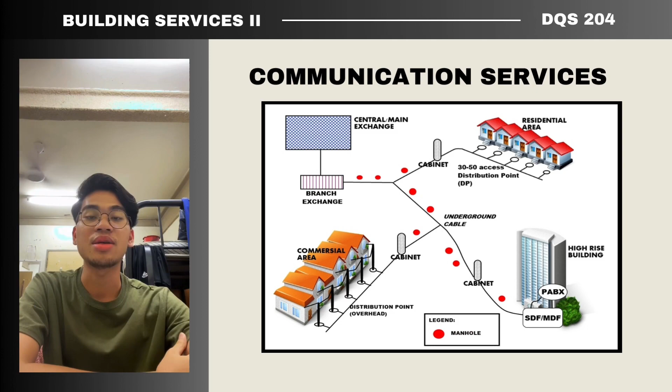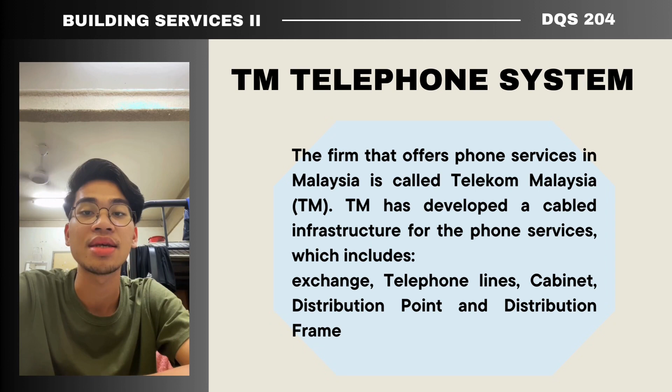So, what is TM telephone system? TM telephone system is the firm that offers phone service in Malaysia. It's called Telekom Malaysia. Telekom Malaysia has developed a cable infrastructure for the phone service, which includes exchange, telephone lines, cabinet, distribution point, and distribution frame.

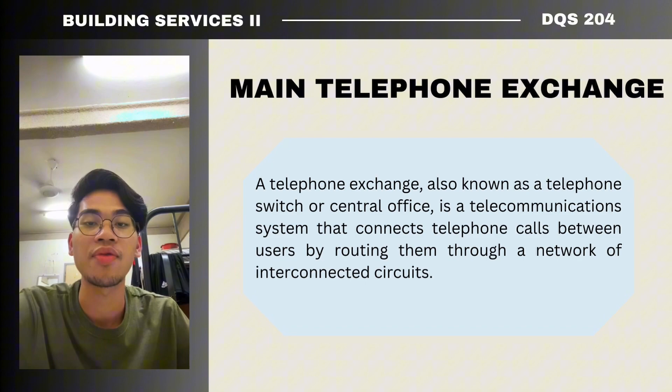What is a main telephone exchange? Main telephone exchange, also known as a telephone switch or central office, is a telecommunication system that connects telephone calls between users by routing them through a network of interconnected circuits. The main purpose of a telephone exchange is to manage and control the flow of telephone calls within a network.

When a person makes a phone call, the exchange receives the signal and routes the call to the intended recipient telephone. The exchange also manages the resources needed to establish and maintain the call, including 3 items. The first item is allocating channels on the network. The second item is handling billing and call records. And the last one is monitoring and managing network performance.

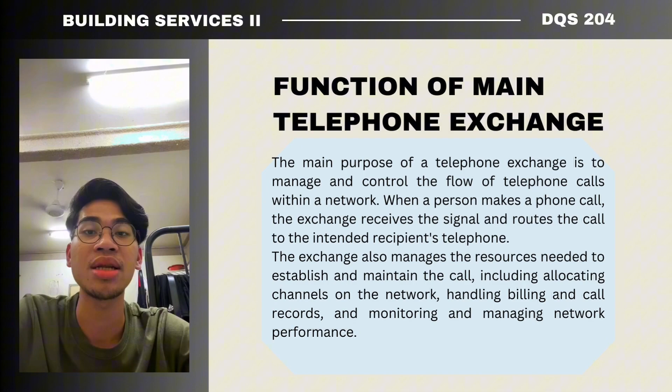A main distribution frame (MDF) is a signal distribution frame or cable rack used in telephony to interconnect and manage telecommunication wiring between itself and any number of intermediate distribution frames and cabling from the telephony network it supports. Next, the main distribution frame is used for distributing the telephone cable into several lines for multi-subscribers with one or more lines in a single building.

Secondly, on terminal blocks, lines from incoming cables are joined to lines from the internal telephone wire. A frame holds the terminal blocks. This frame is known as the main distribution frame, or MDF. Function of MDF: firstly, to simplify network connectivity and management. It acts as the central point where all the network lines converge, making it easier to monitor and maintain network connections. Secondly, MDF enables efficient cable management, reducing clutter and ensuring a neat and organized networking setup.

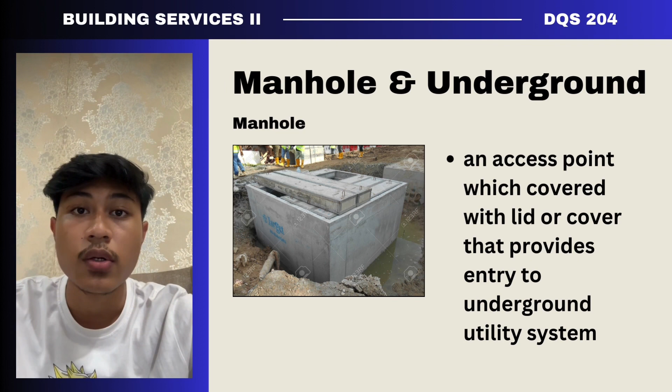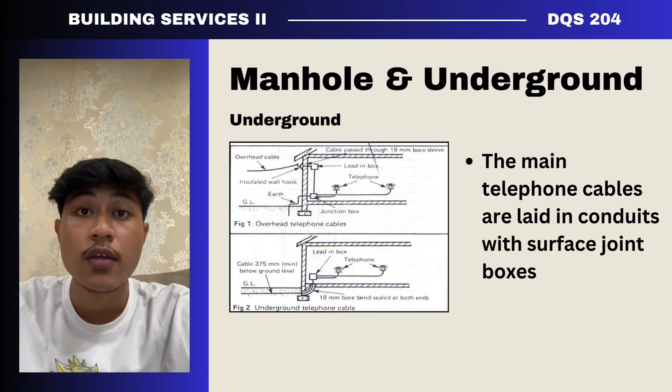Now we'll talk about manhole. A manhole is an access point covered with a lid or cover that provides entry to an underground utility system. The function of a manhole is to provide access points to underground utility networks such as sewage systems, stormwater drainage, water supply lines, gas pipelines, and telecommunication cables. Underground cable: as we can see, the main telephone cables are laid in conduits with surface joint boxes. In addition, most big and medium-sized buildings receive their telephone cables from under the ground.

Overhead cable. In Malaysia, it is mostly used for domestic houses and shop houses. We can find it at a highway or your house area. An overhead cable is smaller and cheaper than an underground cable. So the function of overhead cable is to transmit electrical energy along large distances.

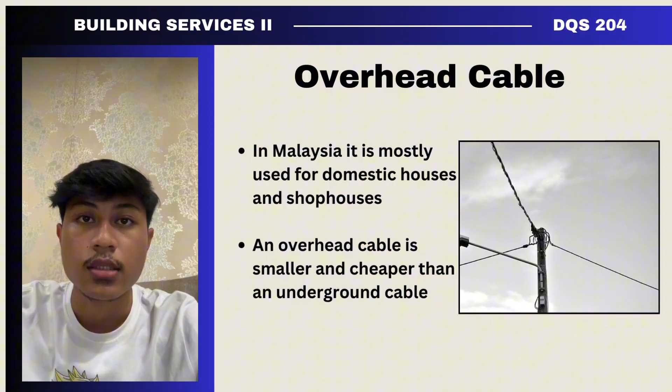Drop wire. Drop wire serves a crucial function in providing the final connection between the distribution network, typically aerial or buried cables, and the customer premises. As a conclusion, they are used for both telecommunication and electrical power transmission services. The drop wire price depends upon the type of drop cable you choose for your project.

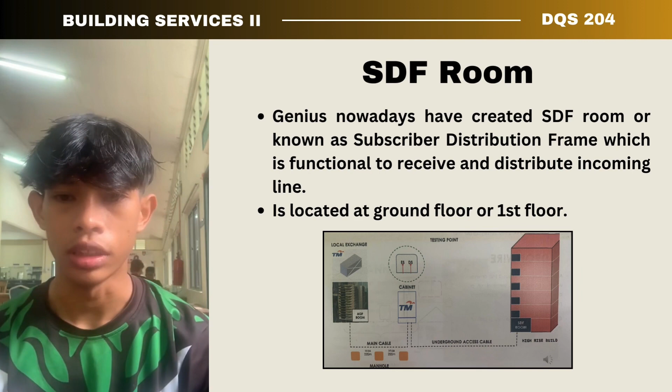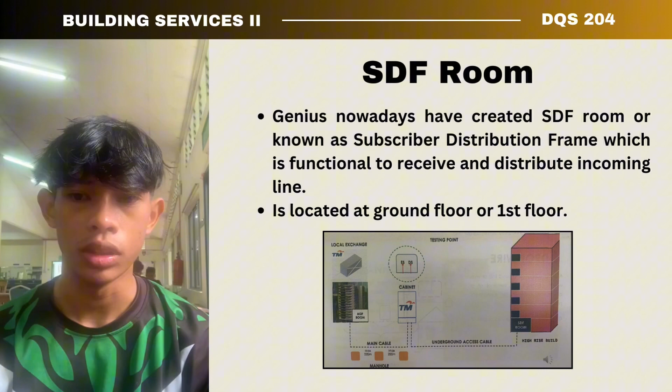So Genius nowadays have created the SDF room, also known as subscriber distribution frame, which functions to receive and distribute incoming lines. And the SDF room is usually located at the ground floor or the first floor.

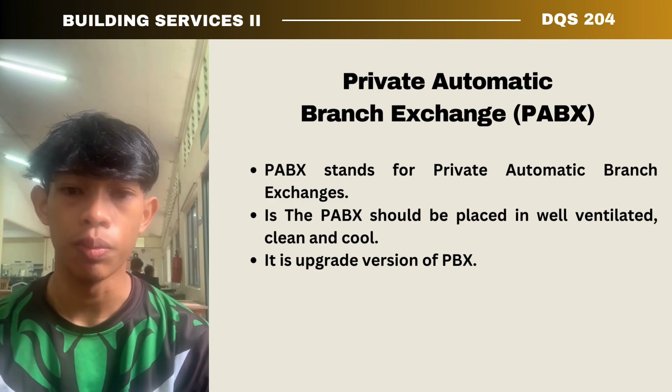PABX stands for Private Automatic Branch Exchange, and the PABX should be placed in a well ventilated, clean and cool place. PABX is also an upgraded version of PBX. Function of PABX: like I've said before, PABX is an upgraded version of PBX. It also enables an office or business to have a single number that includes many extensions. It is also designed to handle lines in high-rise buildings.

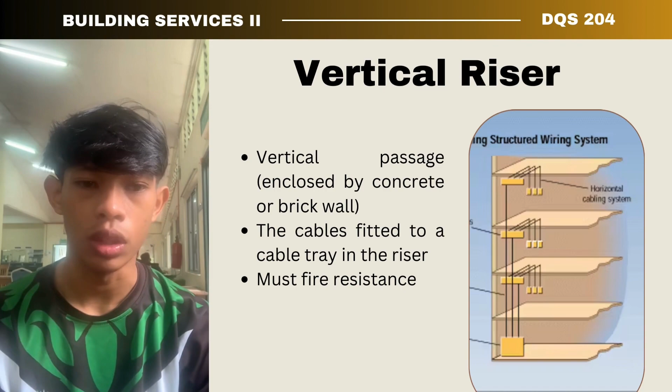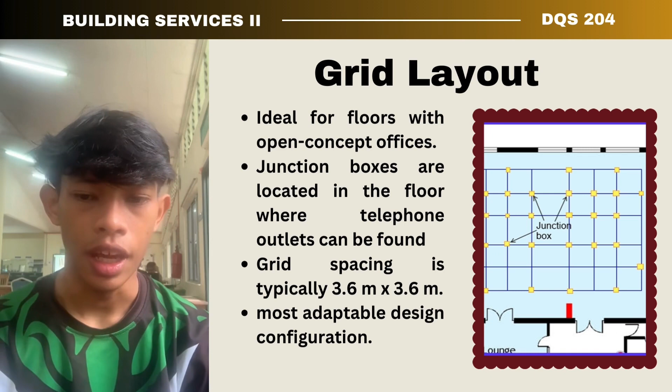There are three types of layout. The first one is grid layout, the second one is branching layout, and the third one is perimeter layout. So firstly, we will focus on grid layout. Grid layout is ideal for floors with open concept offices. The junction boxes are located in the floor where telephone outlets can be found, as you can see in the picture, and it is also the most adaptable design configuration.

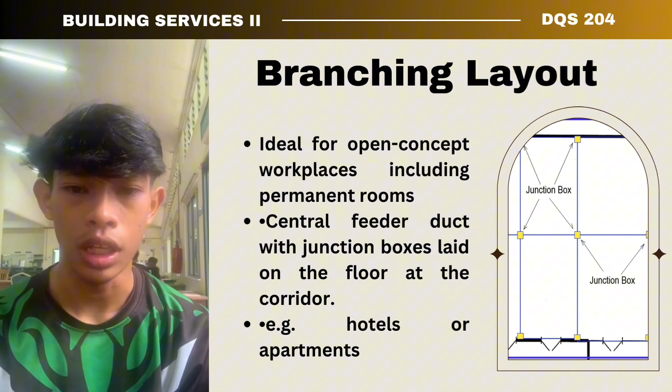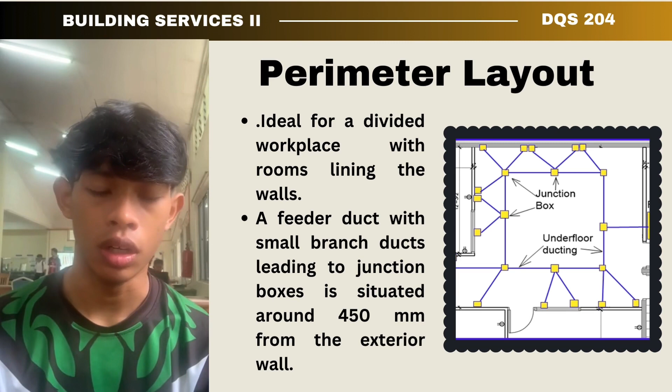The last one is perimeter layout. Perimeter layout is ideal for a divided workplace with rooms lining the walls. As you can see in the picture also, the feeder duct with small branch ducts leading to junction boxes is situated around 450 mm from the exterior wall.